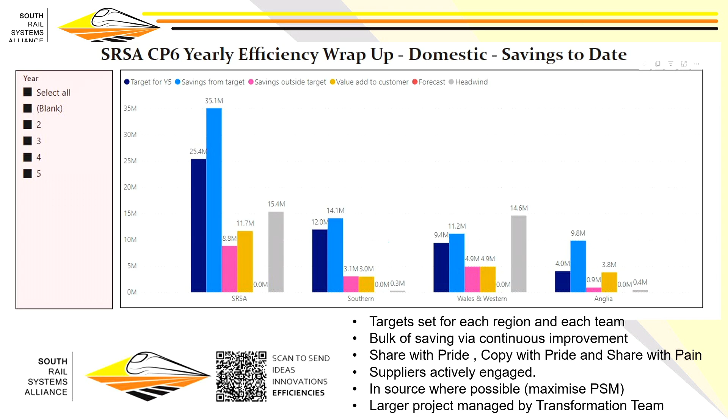So we talk about the alliances and what we do. So just for example, this is my efficiency programme for the last control period. And we had a target to save £25 million beyond the target. So we agree a target with the routes and regions, and we also then strive to deliver efficiencies beyond that target. And we actually have a contracted efficiency of 3.8%. So over the last control period, we actually saved £35 million beyond the target.

So how did we do that? Well, it's not just me. I'm pretty useless. So we set a target for each of our regions. So I saw Alan's in here. And it's all through, mainly, continuous improvement. Everybody's encouraged to make that little bit different. You know, can they do your job that little bit better? We share with pride, we copy with pride, we steal with pride.

We have an active supply base, we have a suppliers forum. They're all invited to the party. Where possible, although we've got an active supply base, we try and do as much ourselves with our PSM staff. Network Rail are paying for those PSM staff. We need to maximise and use them as much as possible. So in-house surveys are a massive big stride we made. And someone just sent me an efficiency: just in Wales and Western, we reckon we saved 300k this year just by doing the survey ourselves, which is huge.

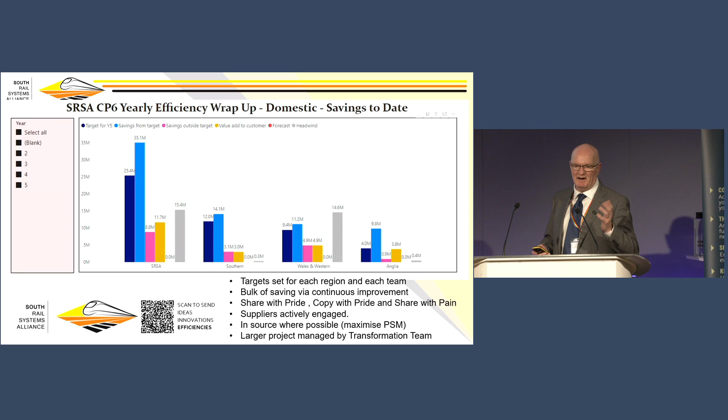So, sustainability. There's an awful lot in this conference about sustainability. And this slide was shown to me: how much embedded carbon is in a track renewal. So probably no great surprise that over 60% is actually the rail. Loads of embedded carbon in rail. I think Darren Sharp was telling me there's 2 tonnes per metre. Is that right, Darren? Or somewhere along that. It's a lot anyway. But technology like electric arc furnace and stuff like that will help us deal with that.

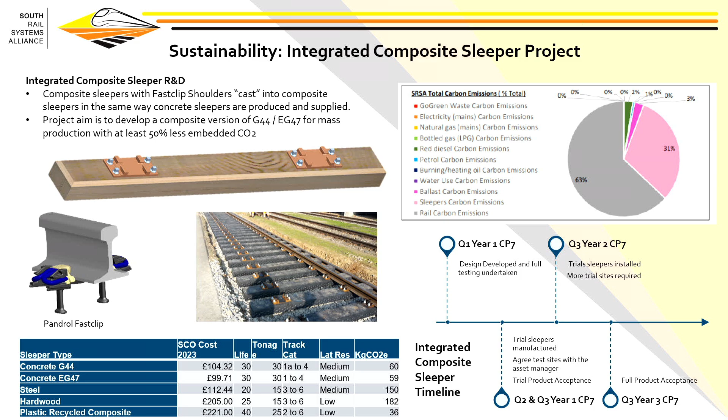The next biggest slice, though, is the pink section, and that's the sleepers. Over 30% of our embedded carbon in the track is as a result of our sleepers. So we've made some great strides. Concrete's gone down from about 80 kilograms to about 40, 50. So massive, that was already mentioned this morning. We got the composite sleepers, again, compared to a wooden sleeper, massively reduced. But the only problem with the composite sleeper, well, I say problem, is they use base plates rather than integrated housings, and they don't particularly lend themselves to track renewal.

So I rather stupidly said, well, can't we have a composite sleeper with a Fastclip housing? And the answer I actually got was no, which was a bit bizarre. So, of course, anyone who says no to me, if they know me well, that's like a red rag to a bull, and I thought I can do better. So I set about trying to get some money to make an integrated composite sleeper, using recycled plastic, recycled car tyres, and basically have an integrated housing in it.

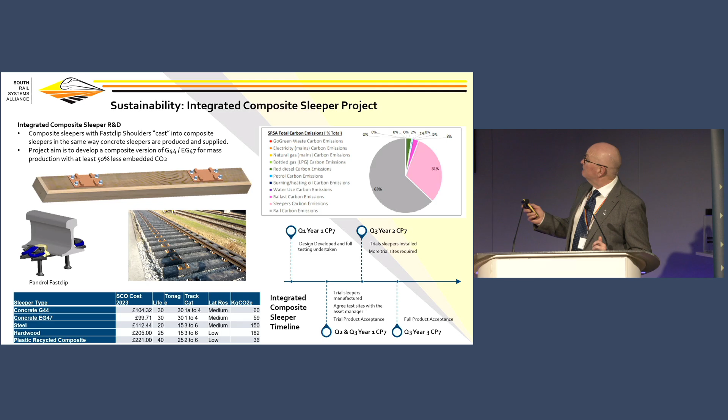And, oh, here we are. We have the hedgehog sleeper, which is a little bit of a strange design. It's called the hedgehog sleeper because the Dutch company said it looks like a hedgehog. I think it looks a bit more like a crocodile, but I'm not going to split hairs on it. But we managed to reduce the embedded carbon quite significantly. So about 90% less embedded carbon compared to a hardwood sleeper.

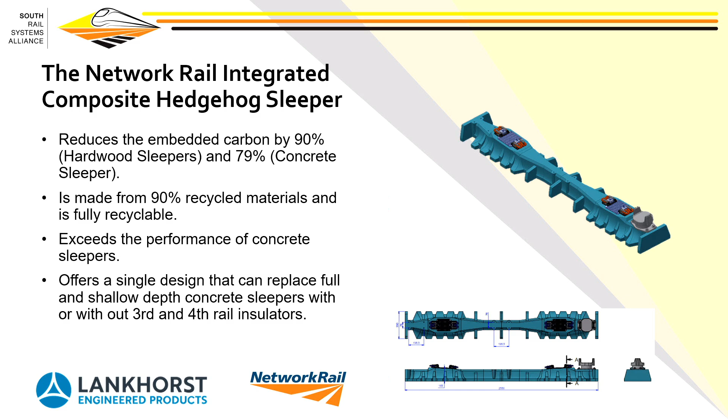And 79, this is probably a little bit less now with the good work Darren's done with the concrete manufacturers, but a lot less. At the moment, it's made from about 90% recycled materials. However, going forward, with the electric arc furnace, because there is steel in this, that'll go up to 100% recycled materials. And at the end of its life, the whole thing can be ground up and made into another sleeper or whatever it is. It exceeds the performance of concrete in just about every parameter.

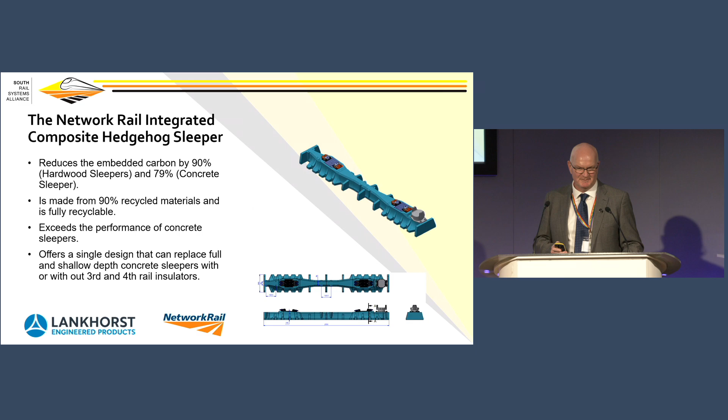And I'll show you a little bit about all that. And what's really, really pleasing, I set out to have an EG47 equivalent, a G44 equivalent. I now have a single design which basically performs the same as a shallow depth and full depth sleeper, but also does third and fourth rail at exactly the same time. So one product does the job of every single other sleeper. So there's just a little bit more information. We'll share these slides, and I'm just a bit conscious of time, so I won't go into it.

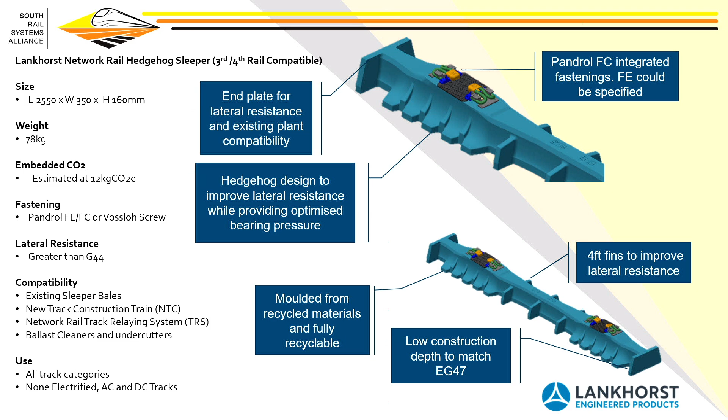But the sleeper's designed to work with all our existing plant, such as the TRS, should we choose to keep it, ballast cleaners, and there's other factors. So lateral resistance: although it only weighs 78 kilograms compared to 308 kilograms for the G44, we actually have greater lateral resistance, and that's due to the design of the sleeper.

So again, what do we make the hedgehog sleeper out of? Well, believe it or not, it's beer crates and bottle tops. Beer crates are very close to my heart, so I'm happy I can do something to make that better. It's injection moulded, high density polyethylene, and the beauty is at the end of its life, because it's plastic, we can just grind it all up again and make more sleepers. So we talk about the circular economy.

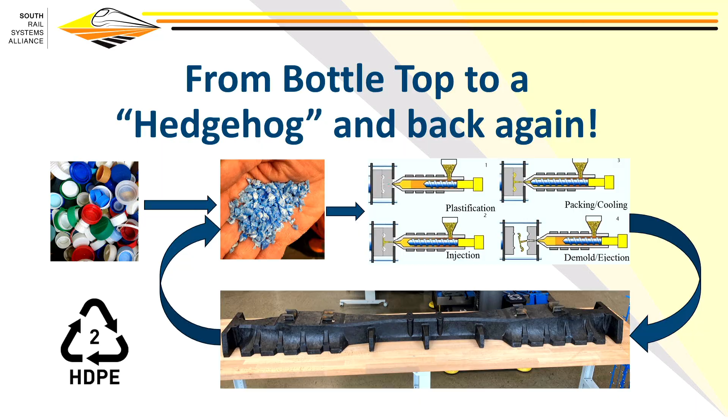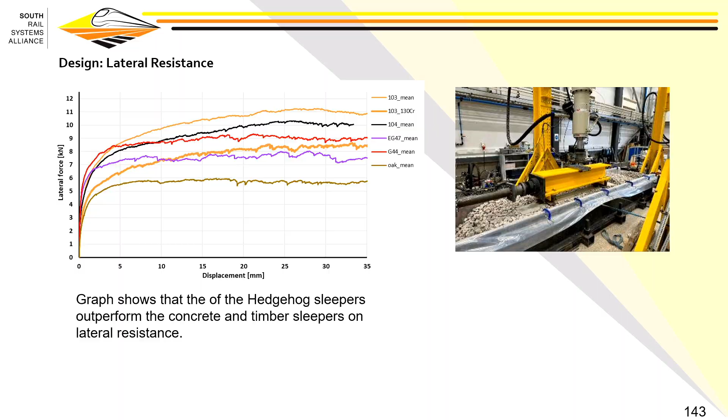We talk about climate change, being able to resist that hotter weather - the hedgehog sleeper does that for us, or helps us. This is G44 without an under sleeper pad, before Darren corrects me on that one.

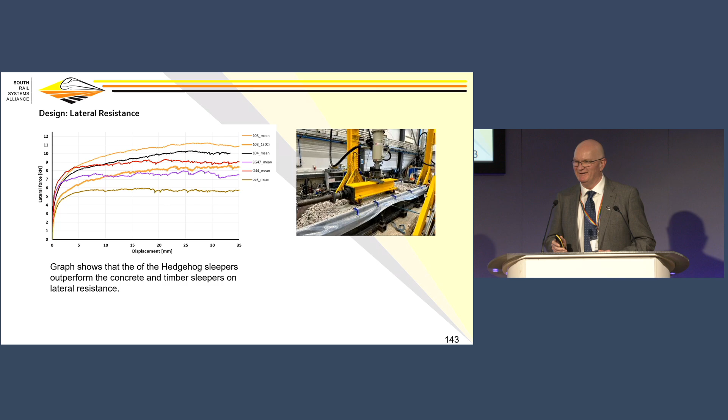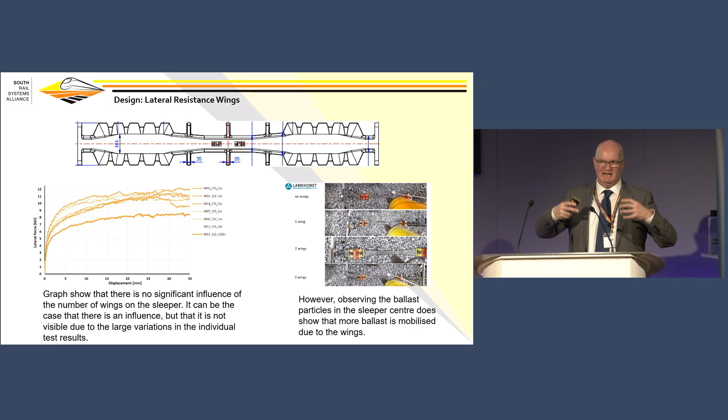We've got these wings on it, and believe it or not, we did some testing with 1 wing, no wings, 3 wings, the whole lot. Actually the wings weren't making any difference at all to lateral resistance, but we have a phenomenon most track engineers know called ballast drift. By putting these wings in, it stops the ballast drift, so it keeps the ballast where it needs to be. And it wasn't really much extra plastic to have the wings in there, so we left some wings in.

We talk about shape, width, and length. We did lots and lots of testing to try and find out what the shape of the sleeper should be, and we came up with an optimum design. It's the same length as an EG47, so it goes with the track relaying system. It's the same height as an EG47, so we get all the benefits of a shallow depth sleeper, extra clearances and all that sort of stuff. But because we lost the height, we have to make it a little bit wider, so it's actually a 350mm wide sleeper, which is the same as a G55 cable management sleeper.

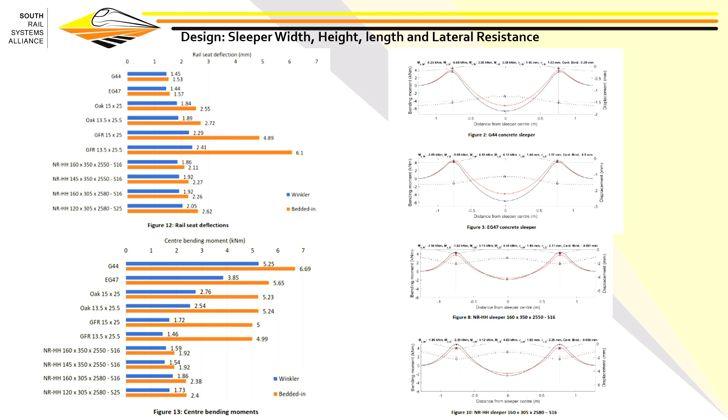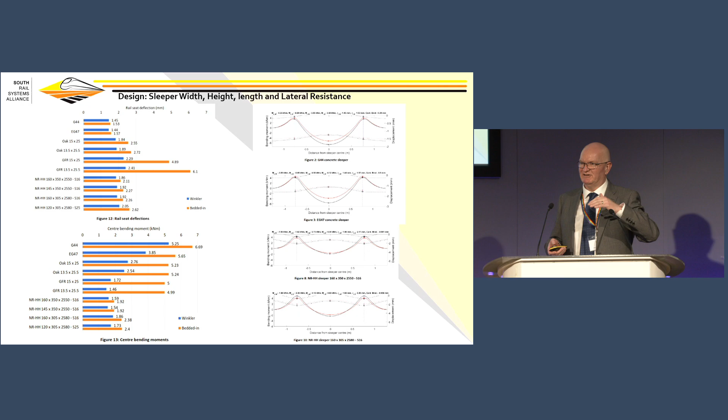We're testing these sleepers as well, to match the equivalent of concrete, so we should be able to use them in Cat 1A track, but we're undergoing all the static and dynamic testing as we speak. So, about an engineering product - someone mentioned 3D scanning earlier.

We use 3D scanning to check that every sleeper that comes out of the moulds meets its geometric tolerances. This is one of our early tests - the green is actually spot on to the CAD model. The blue, although it would pass all our tests as what we say is a good flat sleeper, the company we're working with - because the mould, the plastic goes in hot and it shrinks in the mould, is bigger than the finished product. So we're just doing some work to refine the mould, so those blue bits become green. That's the level of detail we're going to.

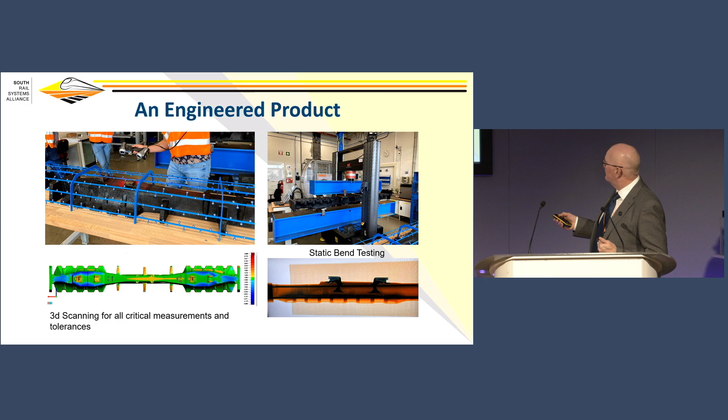Every sleeper that comes off, we quickly scan it on the production line - perfect sleeper every single time. Obviously looking where the rebars are for reinforcement using x-rays, and here's some of the static testing.

One of the big questions I get is how much do these sleepers cost? Composites are very, very expensive, and I'm a little bit fed up with answering the question, but I'll answer it.

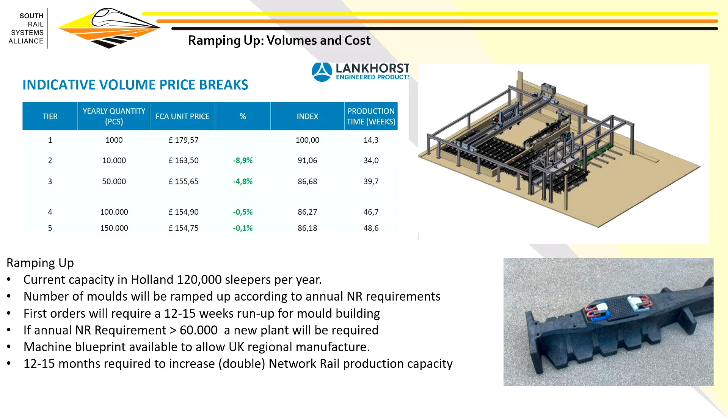A traditional composite, by the time you put all the base plates and everything on, costs somewhere around 200 to 250 quid, depending on the base plates. That's because there's a lot of manufacturing to drill those base plates down, and steel's expensive.

Because we've got an integrated fastening, when we start talking economy of scale, we're down to about £154 per sleeper. More expensive than concrete, granted, but an awful lot cheaper than a base-plated composite.

And when you're talking about whole-of-life costs, again, I don't know exactly how long one of these will last, but it's going to last quite a while in the infrastructure. From a whole life cost perspective, these will really bring the cost down.

And then just talking about the circular economy and local jobs, that there is about the size of a tennis court - that's the plant, the injection moulding plant, to produce an integrated composite sleeper. Once we get to an order of about 50,000 to 60,000, Lankhorst, who make these in Holland, say it's then economically viable to actually go and build these in the UK.

Wales and Western, we put 80,000 concrete sleepers in last year. We only need about 50 to 60,000 to make this project viable. In Wales and Western, or another region, we could have a local railhead making sleepers actually at the railhead - local jobs for local people, no carbon, no transportation of the sleepers, straight into the train, straight to the job. There are absolutely huge benefits to this, rather than massive, big concrete sleeper factories.

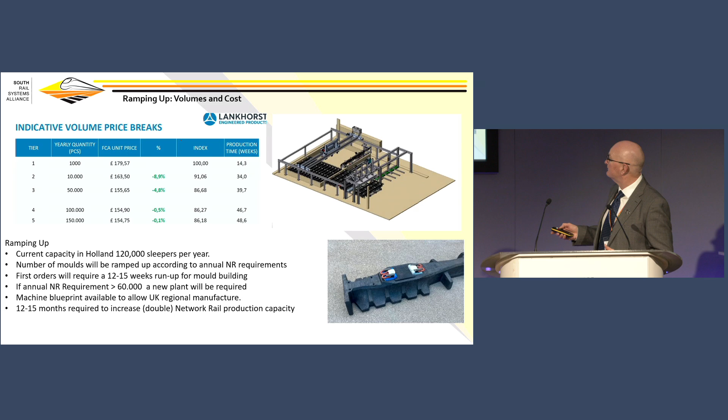So there we are, and this is the InnoTrans, and for our European colleagues, we've got some nice Vossloh fastenings as well, should we need them. How am I doing for time? Five minutes - okay, I'll quickly go back through.

So, although we talked about digitisation, we do digitisation on the Southern Alliance. Just quickly, one of the things we've got is Safe Work Pack 019 compliance.

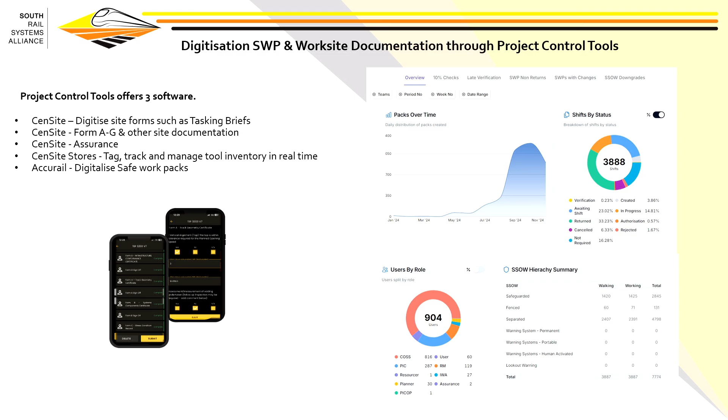The on-track system was written really for our colleagues in maintenance, and we struggled in track renewals to make that system work. So we launched a new system called AccuRail, which takes all the peculiarities of track renewals, and now we have a fully digital safe system work pack. We launched it in July, and now right across the Alliance, our supply partners and everything are fully electronic safe work pack, which is really pleasing.

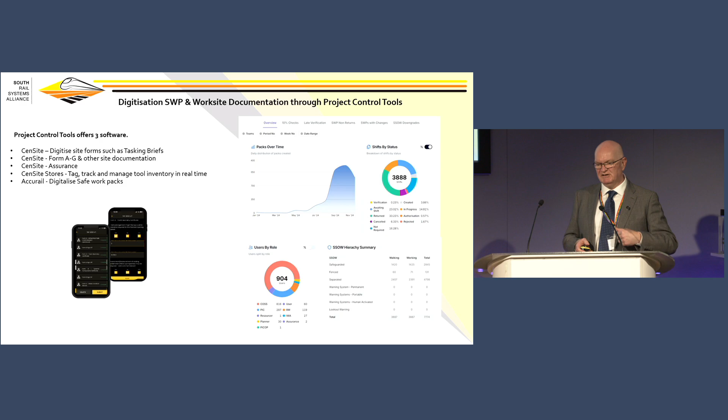That's AccuRail, and we're now moving to a system called CenSite, so basically all our Form A's, G's, all our engineering forms, assurance checks, everything like that will all be digitised going forward.

Life-saving rule: never enter an agreed exclusion zone unless directed. We all know we're absolutely awful at managing our exclusion zones.

So we're working with a company called Zonr, and fundamentally this is a dynamic exclusion zone - as the boom goes out, the exclusion zone enlarges, as the boom goes in it's smaller. Also, when someone steps into the exclusion zone within 10 metres, the person gets an alert on their tag, and the machine controller gets an alert on their tag, so the machine controller can take charge of his exclusion zone.

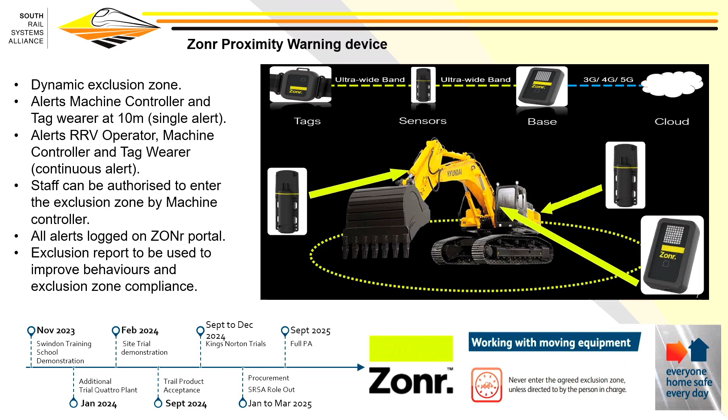If a person then gets within 5 metres of the excavator - bear in mind we walk about a metre a second - the user gets a constant alert, the machine controller gets a constant alert, and the operator in the cab gets an alert too, basically saying stop, there's somebody in harm's way, stop doing it. So we're trialling this at the moment.

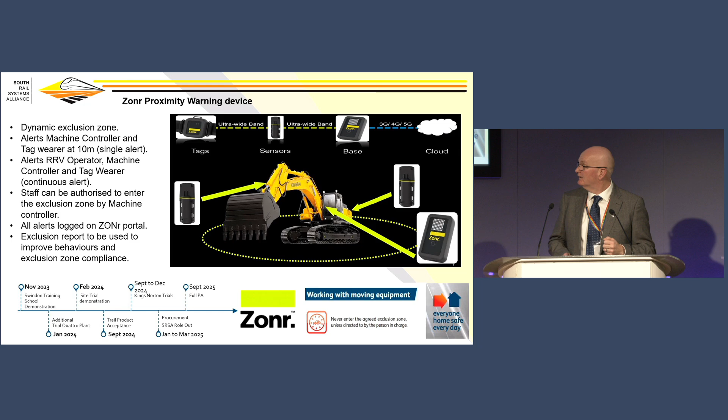It's going through the system review panel again for this, similar to the speed boards, but we'll be rolling this out, hopefully very soon, right across the Alliance.

And then we talked about getting the right plant. This is something we designed, a heavy duty rail crane - basically an RRV version, but with the same lifting duties as a Kirow 250, and it'll be about 40% cheaper to operate. Trouble is, I've got a fully functioning design, I just need someone to pay for it.

When I talk to my supply base, they say give me a workbank, Nick, and we'll go and buy some, but we're not very good at underwriting workbanks. In fact, we're awful at it, and it's something we need to do.

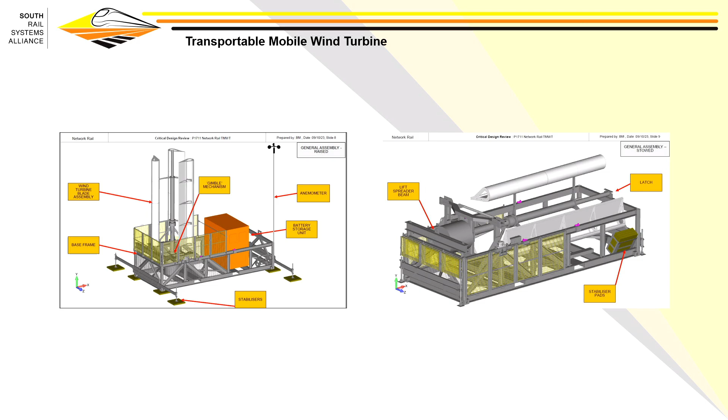And then finally, green sites - we're trying to put solar panels on our welfare roofs. This is another thing I've got some small amount of R&D funding for. Sun doesn't always shine, especially in Wales, as Brian will allude to, but we always have lots of wind, so let's harness some wind power, charge a battery storage unit, and power our welfare there.